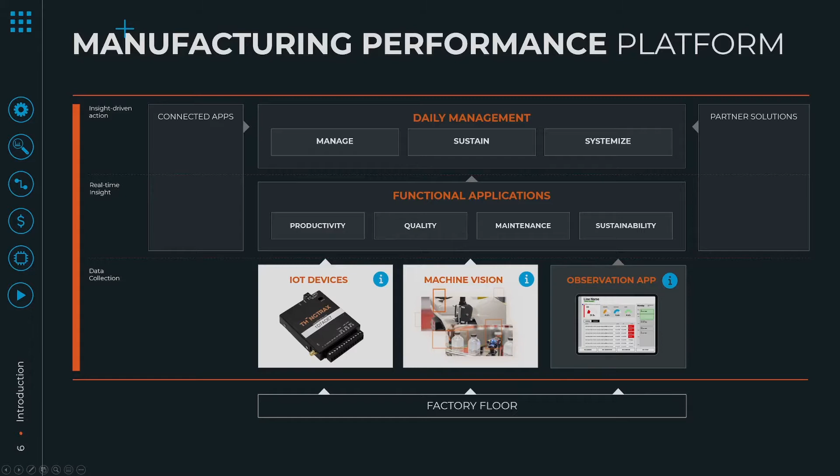The first tier, data collection, is the process of collecting real-time data from the entire production capacity of your business, and we do that in three ways: through IoT devices, where we capture data from your machines and pass it through a gateway to the cloud; through cameras in conjunction with artificial intelligence; and lastly, through an observation app.

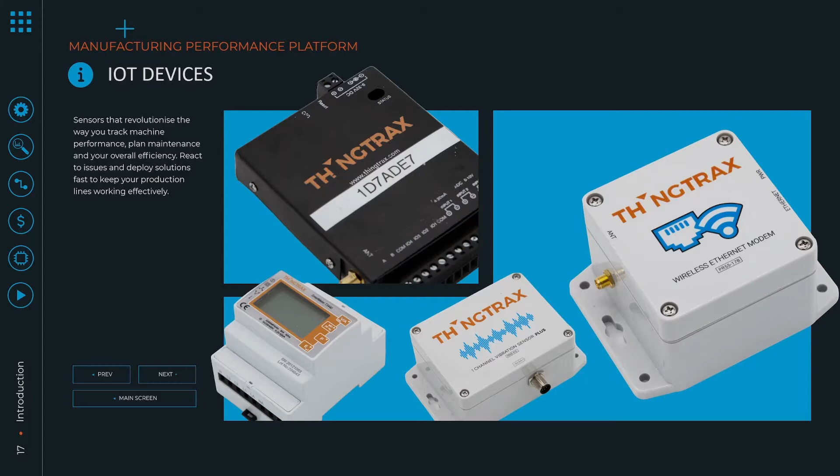We attach these IoT devices to each of your machines, and these devices create their own mesh network, so they can pass the data without the need for a Wi-Fi or wired network throughout your factory. These all go through a single gateway connected to the internet.

Vision is the use of cameras, and through this we can track manual assembly. We can also do things for packing, where we can measure how many units are packed within whichever parameters you have set. This module is mainly focused on capturing manual aspects of production, whereas our IoT devices capture automated processes.

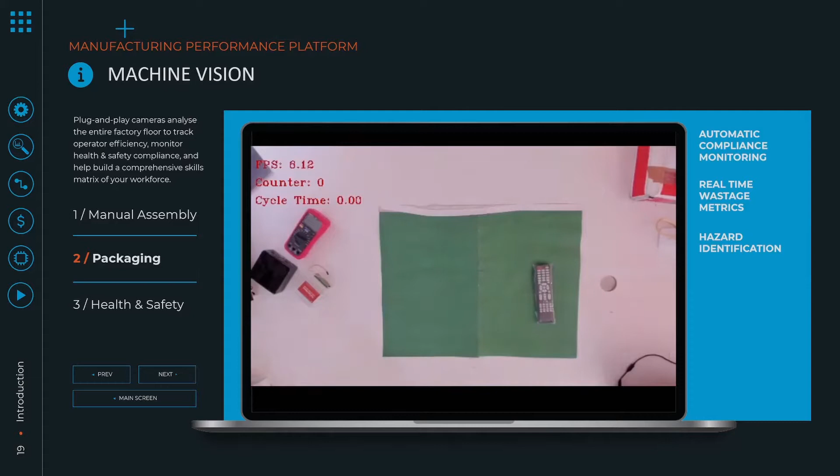In this packaging example, you can see that our system is tracking the time in which this packaging task takes to complete, and displays a counter for how many tasks are completed. From this, we provide a real-time calculation of cycle time.

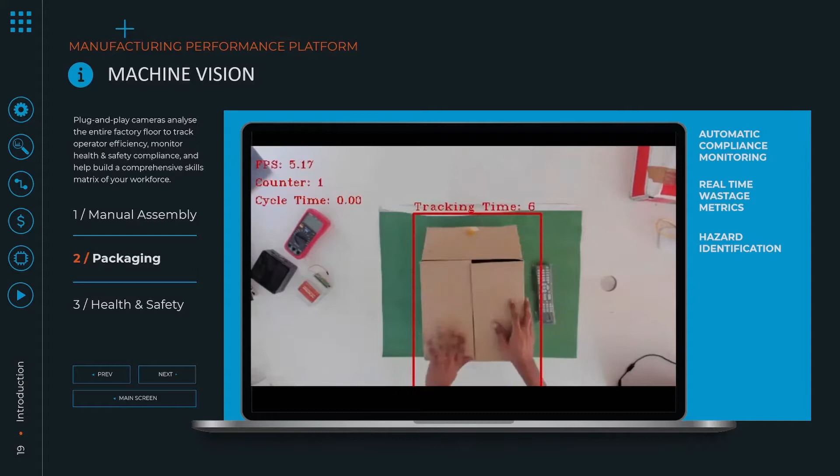This next example shows how we monitor PPE compliance and identify any hazards that occur.

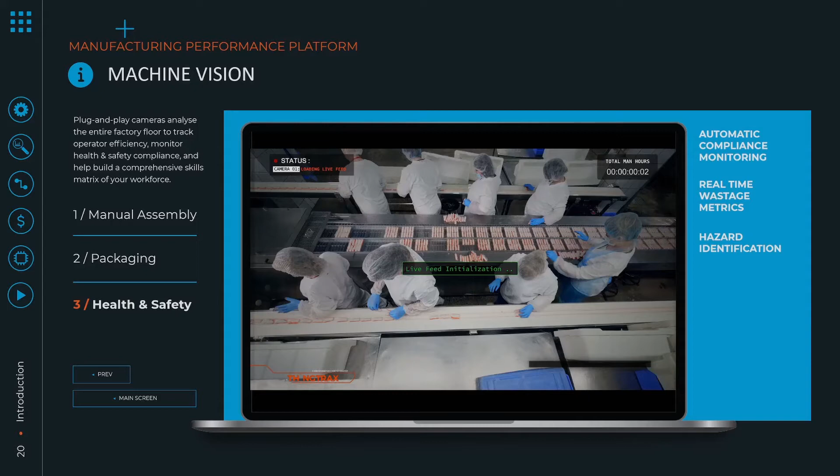Our observation app allows your workforce to simply carry out their roles better. Say if an operator is using a machine on the shop floor and it goes down, they can click add downtime and log the instance. This means that in real time they can quickly and easily enter data into the system to make sure all the data is accurate.

Moving on to the second tier, real-time insight. On a functional level, we have applications for each function within a manufacturing plant: productivity, quality, maintenance, and sustainability. For production on the shop floor, we have an app that will give you everything you'll want to know about each machine, for instance their OEE by each individual machine across the factory, and so on.

You can track the reasons for quality defects and identify the root causes. This makes sure that corrective actions are put into place so that issues regarding quality don't occur, thus ensuring customers receive products of the highest quality.

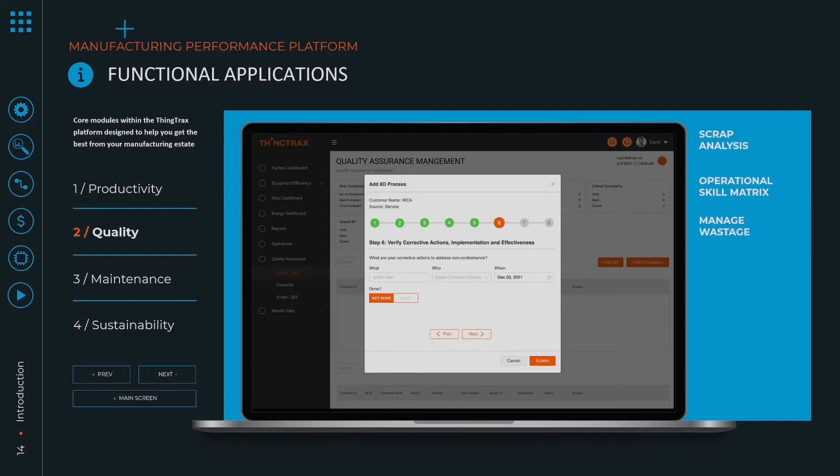The maintenance module analyzes the identified root cause and allows for accurate maintenance planning by providing preemptive recommendations for actions that need to take place.

You can also benefit from sustainability measurement in regard to the utilization of energy, accidents, HR, and things of that nature.

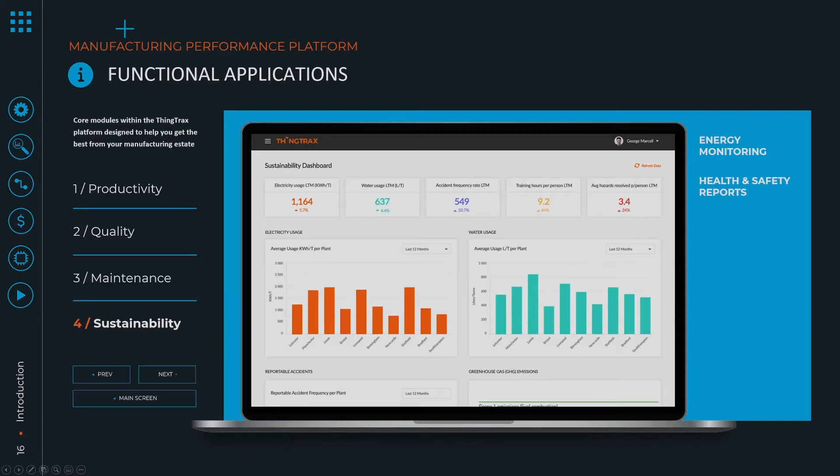Moving on to the final tier, insight-driven action. Layered on top of our functional applications is managerial practice. Being able to use the data at hand to make significant change would benefit from cultural and behavioral change on a day-to-day basis. Our focal point for this is our daily management plan.

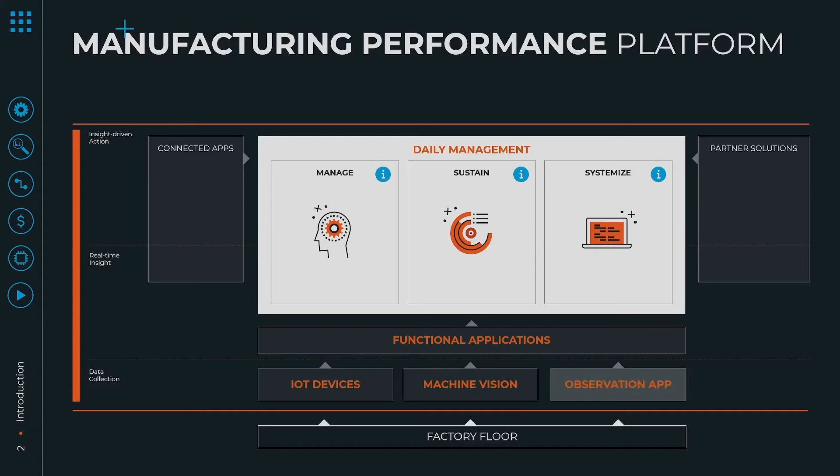Meetings are run on a daily basis in order to optimize the production of your factory. This allows you to run your daily management meetings, looking at your KPIs and assigning tasks to key members of staff, and monitoring the performance of those tasks to ensure you stay on track. From the Manage tab, you can view the status of current or planned actions and tasks, as well as evaluate their outcomes via the visual management dashboard.

Moving on to Sustain, this gives you the ability to monitor and check whether tasks or actions are completed, and lets you audit if things are actually completed. This establishes a standard in regard to the way the work is done.

Lastly, we have Systemize, which gives you the ability to capture standard operating procedures and provide situational e-learning and standard documentation so that everyone knows exactly how they should be doing things.

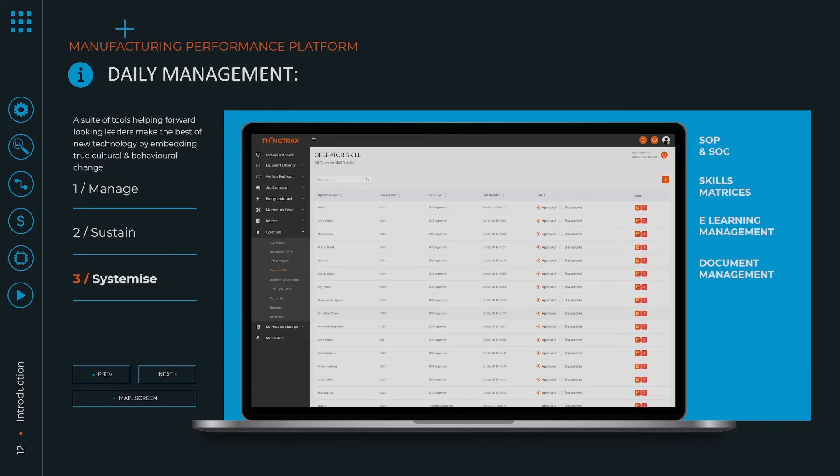Now, it's a common misconception that people think ThingTrax is an ERP, when in actual fact we can operate independently to an ERP or in conjunction with one. We've found that some of our clients have benefited from this because they've seen an increase in data quality.

Some of the connected apps that we are compatible with, as you can see, include popular ones like SAP, Microsoft Dynamics, and 300 more apps that we are currently compatible with. This is a list that is ever growing.

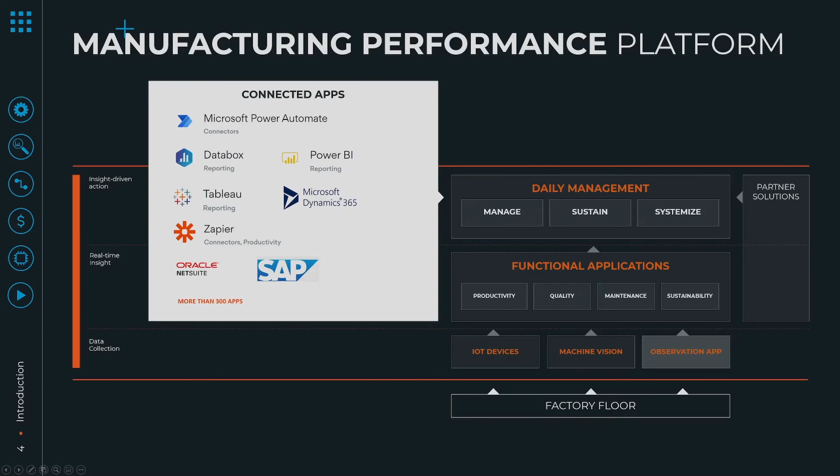Here we have some of our partner solutions with the likes of Tribosonics, UTAC, Necta, MSC, and UAttend, to ensure that ThingTrax is operating at a standard that is of the highest quality.

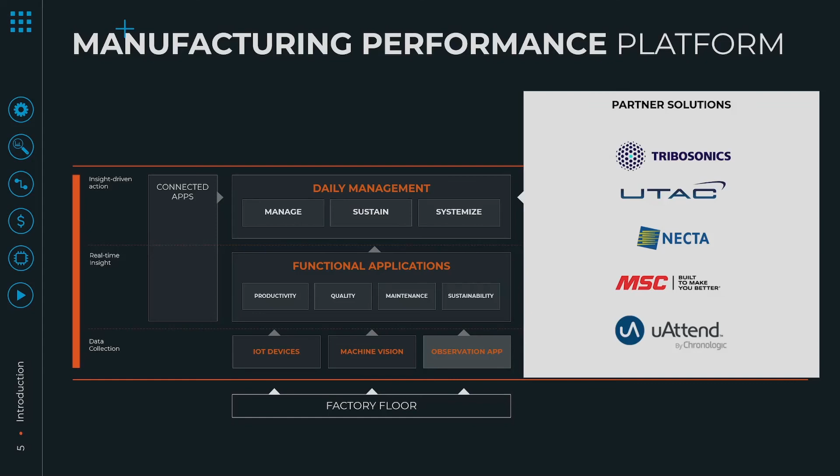That pretty much sums up the rundown of what ThingTrax does. We are the only platform that combines full real-time capture of data across both machines and manual activities in a factory, with operator data entry, with all of the applications in terms of enabling all of the functions in your business, and a practice of enabling your organization from a managerial standpoint. All these things drive manufacturing performance improvement.